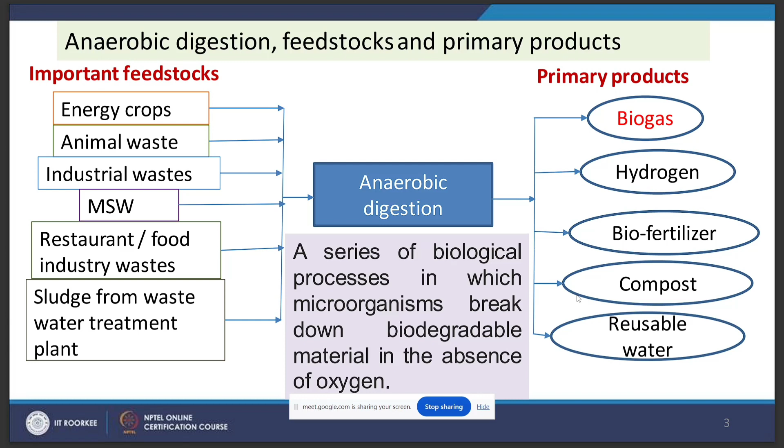So let's see what biogas is. Biogas is a combustible mixture of gases. It has high calorific value. It mainly consists of methane and carbon dioxide, in which CO2 has lesser calorific value than methane. It is formed during the anaerobic bacterial decomposition of organic compounds in absence of oxygen. If we see the major components of biogas, it contains 50 to 75% methane and 25 to 50% CO2, and along with methane and carbon dioxide, there are some other gases which are formed, like

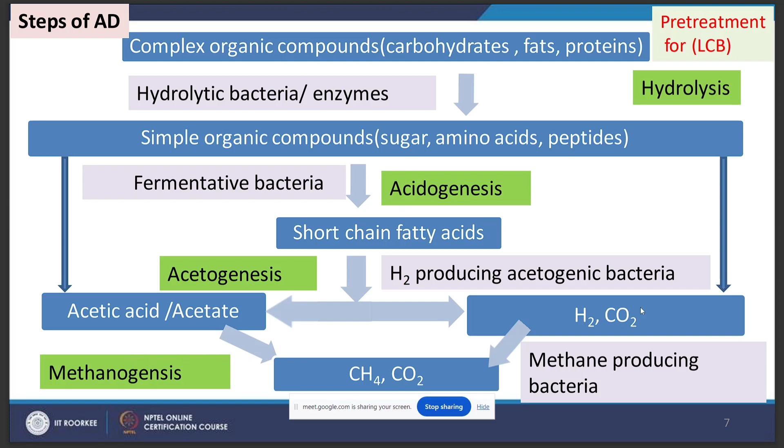After the formation of short chain fatty acid, it can undergo two pathways. It can produce either acetate, or hydrogen producing acetogenic bacteria will produce H2 and CO2. So after acetogenesis, we have two products, acetate and hydrogen. Both acetate and hydrogen are converted to methane by two different pathways. Acetate can be converted to methane and CO2. Also, hydrogen can be converted to methane and CO2 by methane producing bacteria.

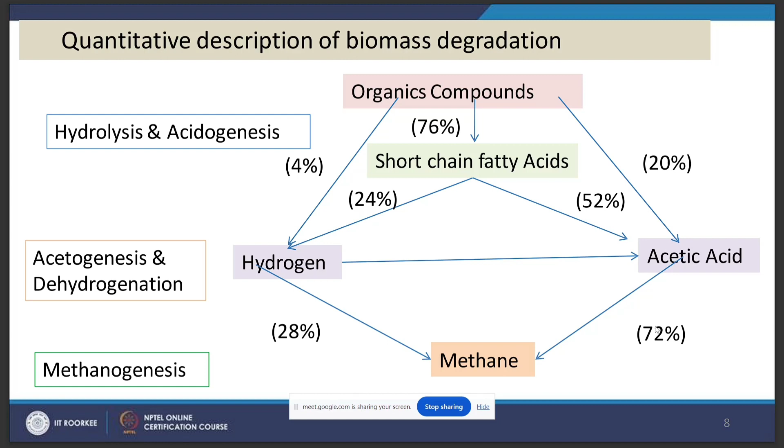So here is the pathway. We can see that the hydrogen to methane route constitutes around 28%, and acetic acid constitutes around 72% of the methane produced in the biogas. So here is the elemental description of anaerobic digestion. Since it is a bacterial phenomenon, it is dependent on microbes.

So different factors will affect the biogas yield. There should be some optimum solid content in the feed. The organic loading should not be very high and should not be very low, so that the microbes can sustain. Next, there should be an optimum carbon to nitrogen ratio. The temperature should be optimal; it is generally around 35 degrees centigrade. For the pH of the solution, acidogenesis requires acidic pH, and methanogenesis requires neutral pH. So pH of the solution should be optimum.

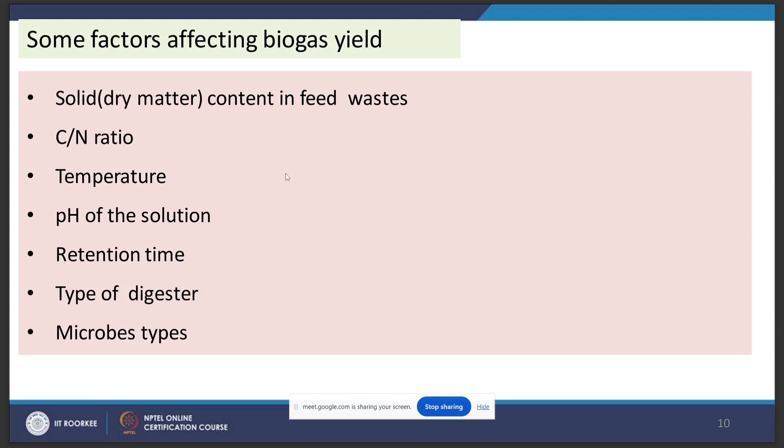And next is retention time. Since the anaerobic digestion is conducted by anaerobes, that is the anaerobic bacteria, the retention time required here is very high as compared to the aerobic bacteria, because their growth yield is very slow. Next is the type of the digester, and last is microbes type.

So here is a group of the microbes which are used in anaerobic digestion. First is the non-methane forming, and the other one is the methane forming. In the non-methane forming, there will be two types of bacteria. First will be the hydrolyzing and fermenting bacteria. Next is the acetogenic bacteria. By hydrolyzing bacteria, some organic compounds are converted into acids, and in acetogenic bacteria, these are the hydrogen producing acetogens and the homoacetogens.

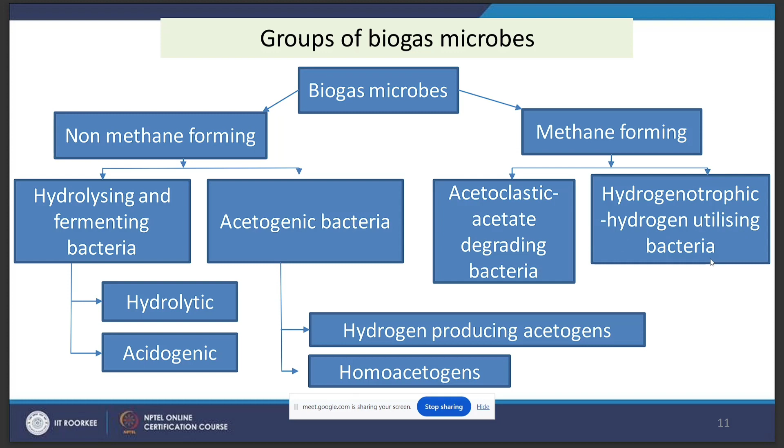Next is the methane forming. We have seen that methane can be formed from two products, that is hydrogen and acetate. There will be two classes of bacteria. First is the acetoclastic, acetate degrading bacteria, and next is the hydrogen utilizing bacteria. So the role of microbes involved in the three stages. The very first step is the fermenting bacteria, which converts the complex organic compound into simpler one. This process is known as hydrolysis.

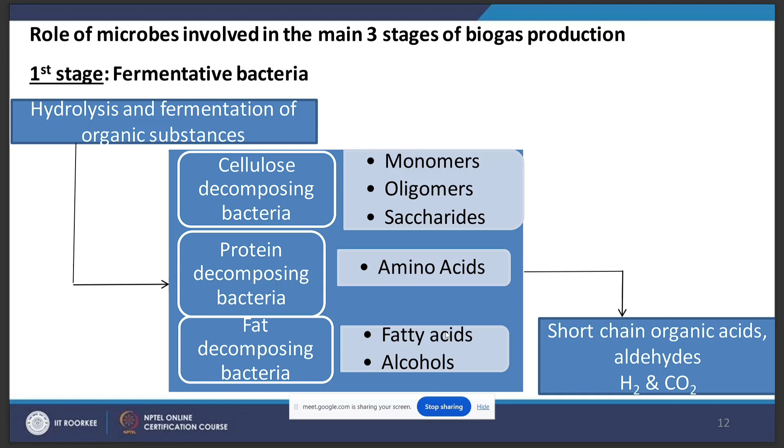So we can see that all this cellulose, protein and fat are converted to short chain organic compounds like hydrogen and CO2. The protein is converted to amino acid, which is further converted to this one. Fat is converted to fatty acids and alcohol. Cellulose is converted to monomers, oligomers and saccharides.

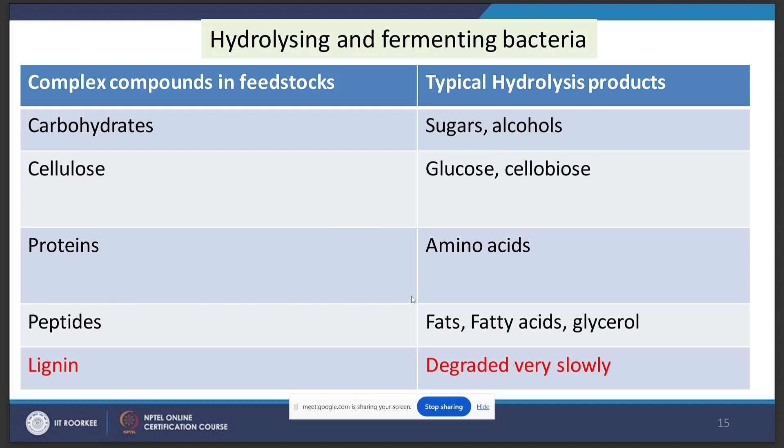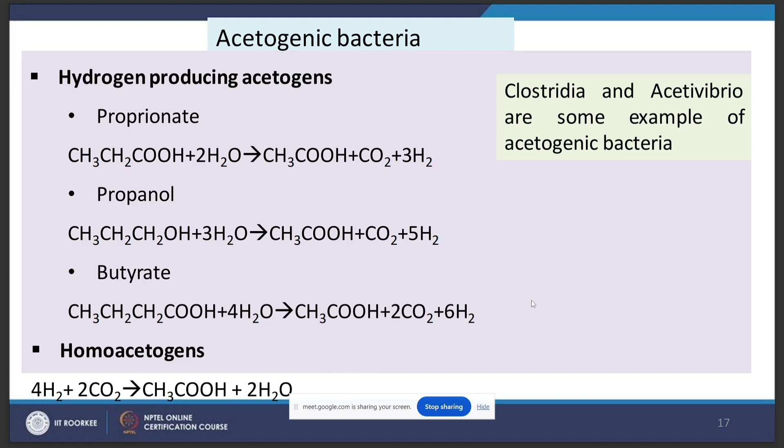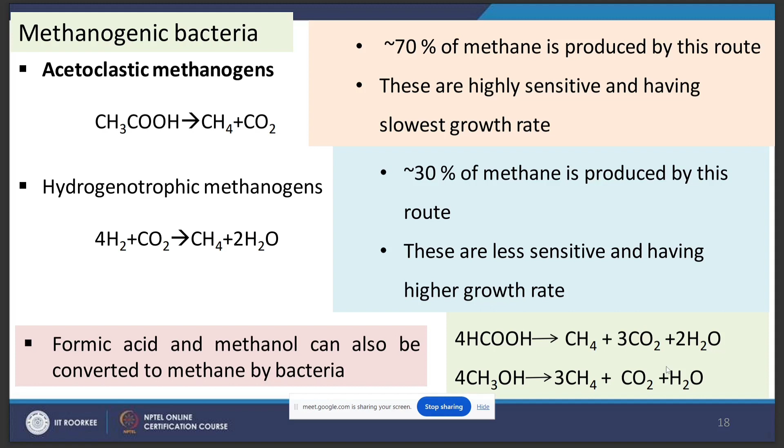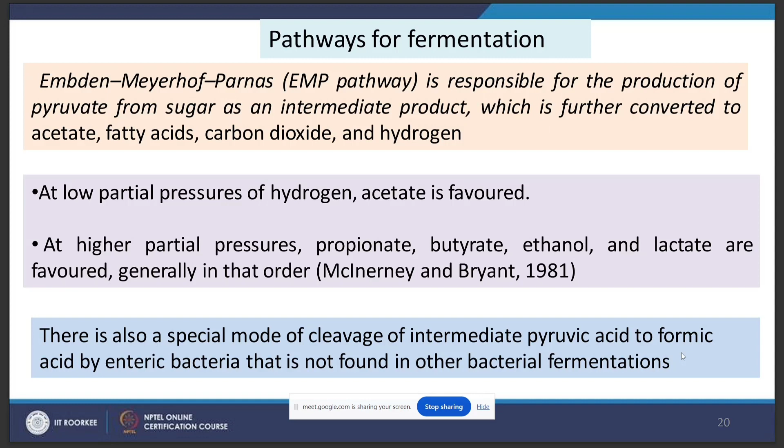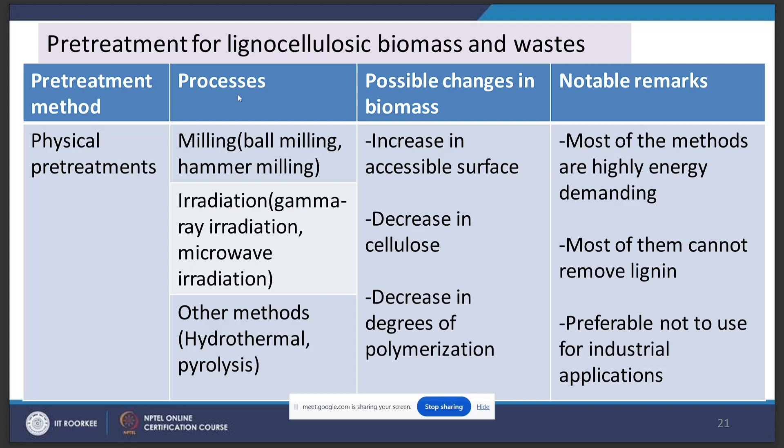So, I have discussed in the flowchart that some sort of pre-treatment is required for lignocellulosic biomass. Some of the physical pre-treatments are ball milling, where size reduction is required, irradiation and other methods. Then next are the physicochemical pre-treatments like explosion, alkali treatment, acid treatment, or treatment with some sort of oxidizing agents.

And last is the biological treatment, in which some sort of fungi or other microbes are used, which reduces the degree of polymerization of cellulose, or leads to partial hydrolysis of hemicellulose. Another possible change in biomass is that, since lignin is very hard to digest, delignification takes place. So let's move to the next.

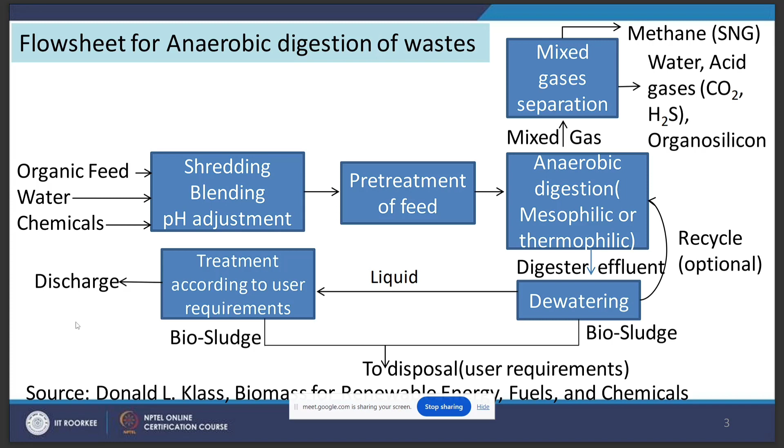So the second lecture is also on energy production from organic waste through anaerobic digestion. Here is the flow sheet for anaerobic digestion. We can see that after pre-treatment of the feed, anaerobic digestion is conducted. We get the gaseous product, and we get the digested effluent, which after dewatering gives sludge and liquid, which after proper treatment can be discharged or sent to the start of the treatment plant if sludge is being digested.

So there are two types of anaerobic digester. It can be dry or it can be wet. Basically, in dry anaerobic digestion, the total solid content is high compared to wet. In dry, it is 25 to 45%, so this much will be solid and the rest will be water. But in wet, the solid content should not be more than 15%.

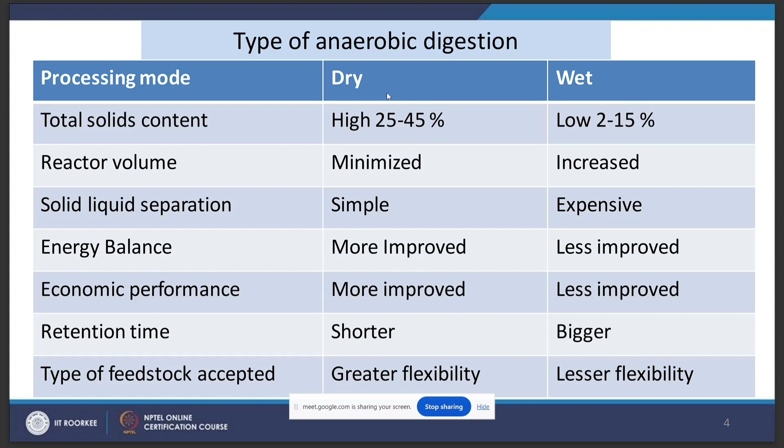As dry reactors have high solid content, they require less reactor volume. Solid-liquid separation will be simple. The energy balance will be improved. It will be economically more viable. Its retention time will be shorter, and it will have greater flexibility of feedstock.

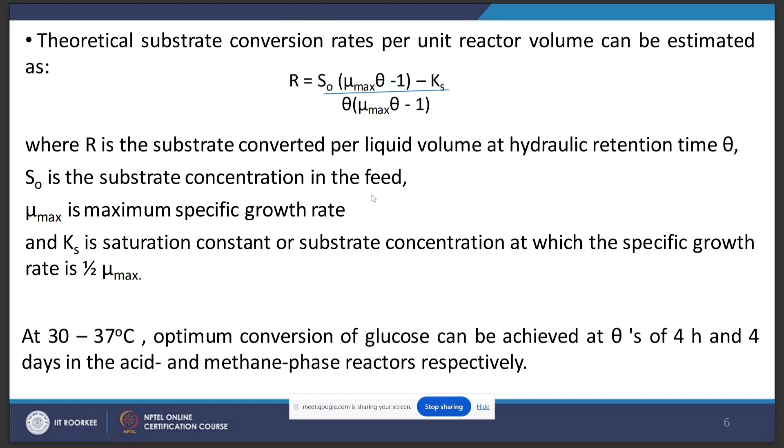Also, the transfer of gaseous product to the gas phase may be the rate limiting step in some cases. Here a formula is given for the theoretical substrate conversion rate per unit reactor volume. Please go through this. Next, retention time is discussed. Please also go through these.

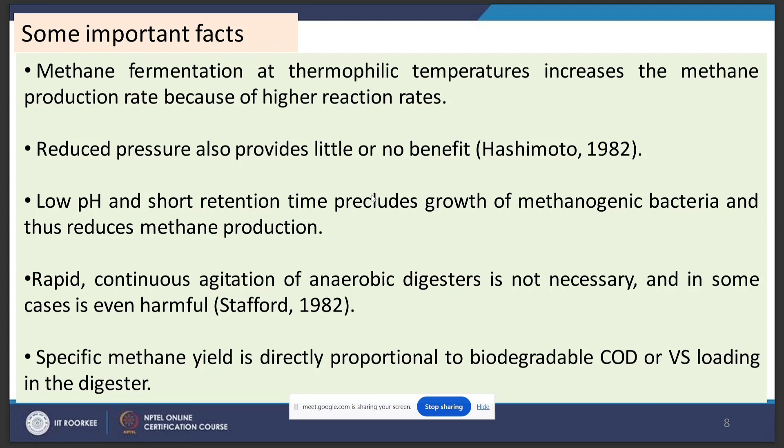And if there is vigorous mixing, then there are chances that these methane forming bacteria or the other bacteria in the reactor will not be able to multiply, and so it will be harmful for the digestion. And the specific methane yield is directly proportional to the biodegradable COD or volatile solid loading in the digester. If the feed has higher biodegradable COD, then the methane yield will be high because these microbes feed on the biodegradable COD.

So here is a figure for the anaerobic digester. We can see that it has different parts. The bottom part has space for ground sludge pipe and ground injection pipe. Next, it has a mixing zone. At the bottom, the sludge after digestion settles, and from here it is taken out from time to time. Above this, we have a mixing zone where mixing of the digester is done.

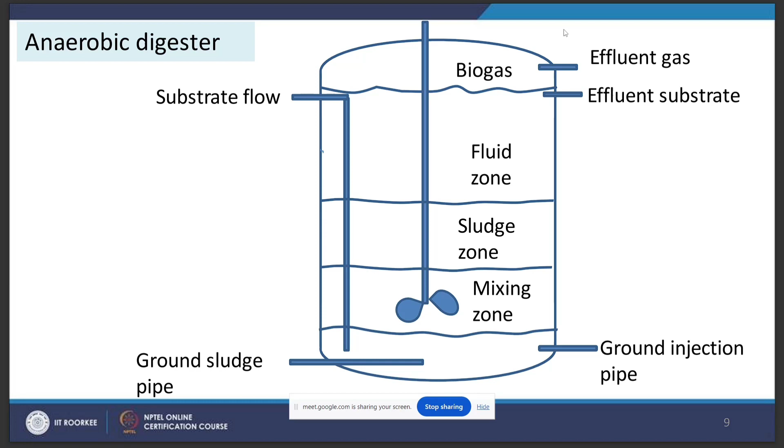Next is the sludge zone. In the sludge zone, the active digestion takes place. Above that, it has a fluid zone in which the supernatant accumulates, and this is taken out from the reactor. And there is also an outlet for biogas, that is the effluent gas.

So there are two types of digester. It can be a low rate, the conventional digester, or it can be a high rate digester. In the low rate conventional digester, intermittent mixing is done, and intermittent sludge feeding and withdrawal is done. It has a detention time of generally 30 to 60 days, that is 1 to 2 months, and the feeding rate is also less as compared to the high rate digesters.

And in the high rate digesters, continuous mixing is done so that the whole sludge and the feed inside the reactor is homogenized. It can be continuous or intermittent sludge feeding and sludge withdrawal. And here the detention time is very less. We can see here it is generally less than or equal to 15 days, which is much lower than the low rate digesters.

Also, most digesters are heated and operated in the mesophilic range, and are made of concrete or steel. We have seen previously that with increase in temperature, the yield of the biogas can be increased, so these reactors are generally heated to maintain the optimum temperature. So here some of the digester operation is given: most digesters are operated in the temperature range of 30 to 38 degrees centigrade.

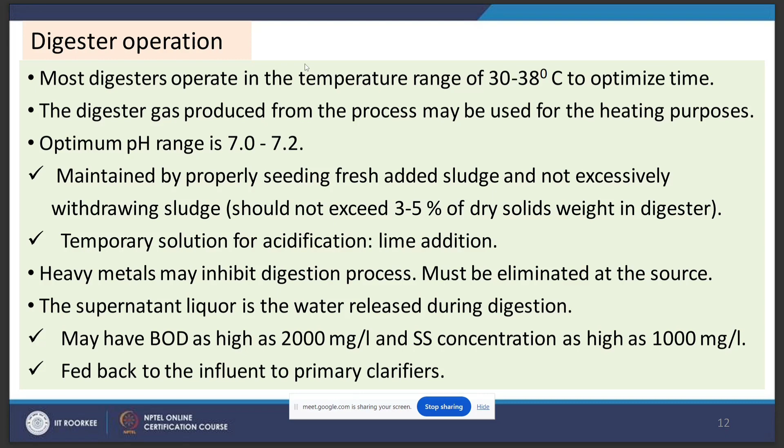So what happens during anaerobic digestion: complex organic compounds are converted to simpler ones. This is the hydrolysis step, and after hydrolysis, acidogenesis takes place, in which the simpler organic compounds are converted into acid. For the acidogenic reactions, the favorable pH is less than 6, around 5.5 to 5.9. The acidogenic bacteria thrive at slightly acidic pH, but the methanogenic bacteria thrive at neutral or slightly basic pH.

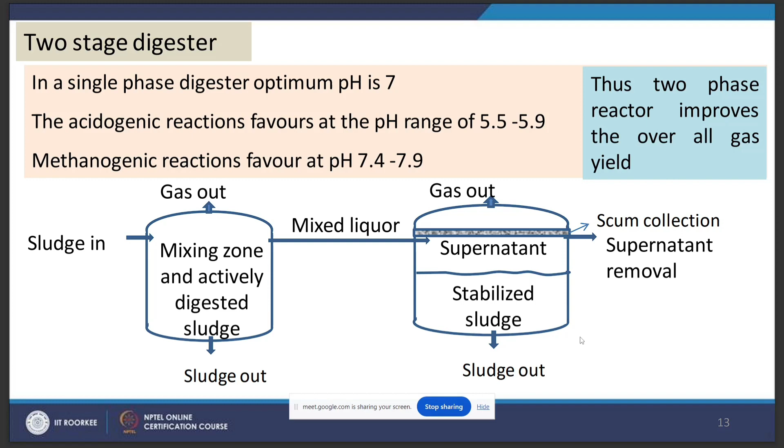And we have seen that the methanogens are very sensitive and have a very slow growth rate. So to increase the efficiency, two reactors can be used. In the first reactor, hydrolysis and acidogenic reactions take place, where the pH can be lower than 6, and in the second reactor, methanogenesis takes place, in which the pH is around neutral or slightly basic, so that proper acidogenesis and proper methanogenesis take place, and we get optimum yield of the biogas.

So here is the schematic of the two-phase digester model. Here we can see that the acid reactor is different and the methane reactor is different.

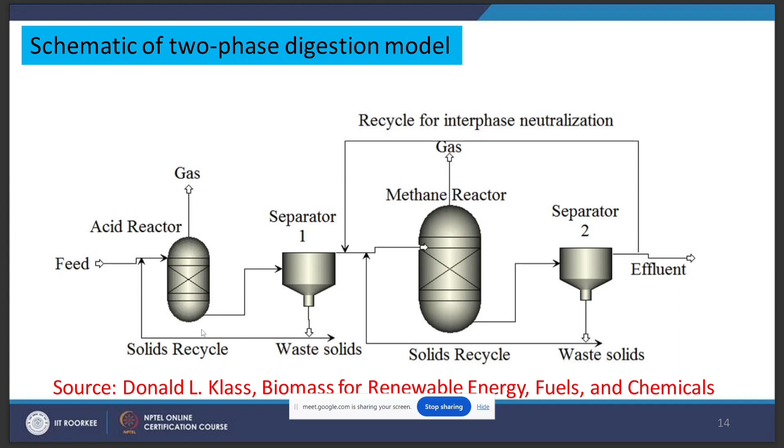So in two-step anaerobic digestion, the main biochemical reaction that takes place in the first reactor is the liquefaction of organic solids, digestion of the soluble organic materials, and it is usually a high rate digester with fixed cover and continuous mixing. And the second stage is generally a conventional low rate digester with a floating cover and intermittent mixing.

So the main process which takes place in the second stage is the supernatant separation, that we have to separate the water from the feed. Next is the gas storage. Whatever gas is produced in the reactor needs to be stored, and digested sludge storage, which is stored at the bottom of the reactor.

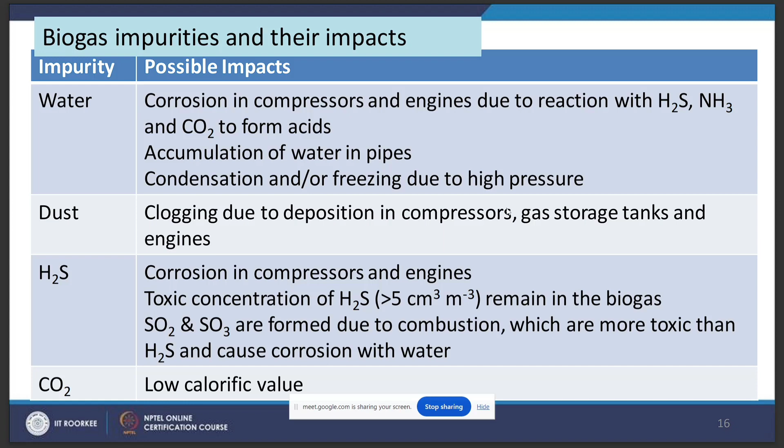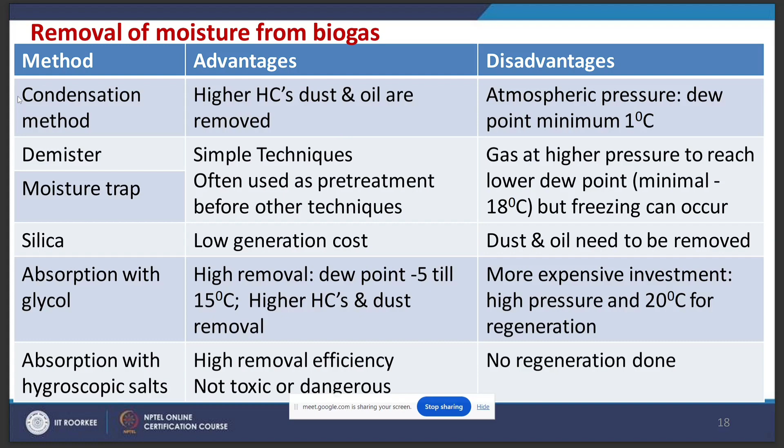Also the biogas which is produced, we have seen in the first slide, has some other impurities like water, hydrogen sulfide, CO2 and dust, which need to be removed. Otherwise it can cause some operational problems during energy generation. So these are some of the methods for removal of moisture from biogas: we can follow condensation method or demister, moisture trap, or we can use silica.

So next is the sludge volume. The volume of digesting sludge in a digester will be a function of volume of fresh sludge added daily, volume of digested sludge produced daily, and the required digestion time. So the volume of digesting sludge will be a function of all these three. And from some empirical evidence and some experiments, it has been seen that

if supernatant is removed from a batch of digesting sludge as it is produced, then volume of remaining digested sludge versus digestion time is a parabolic function, and we get that the average volume will be V1 minus 2/3 (V1 minus V2), where V1 is the volume of fresh sludge added, V2 is the volume of digested sludge produced, and V average is the average volume of the digesting sludge.

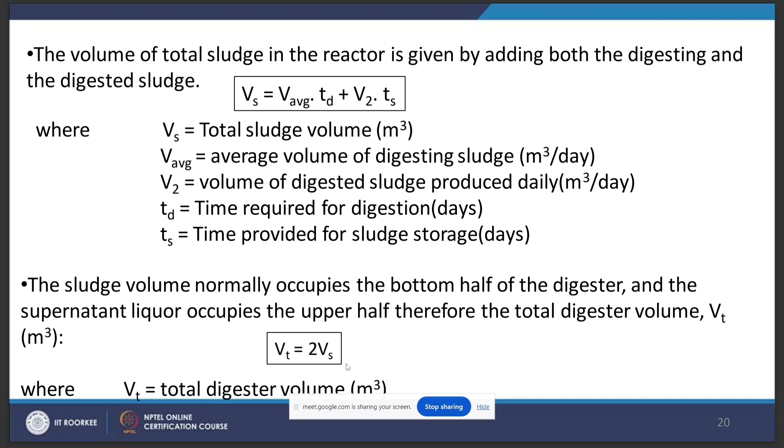So the total volume of the sludge in the reactor will be the average volume and V2, the volume of digested sludge, into their respective retention times. And in the anaerobic digester, the bottom half of the digester is normally sludge, and the top half is used for water, that is supernatant, and biogas. So the total volume of the digester is 2 times the sludge volume. So let's go to the next one.

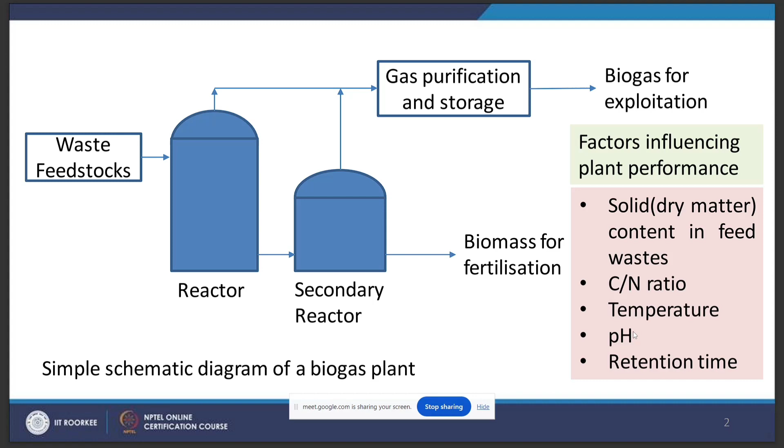So this is the last lecture for anaerobic digester. Here the design of anaerobic digester is discussed. If it is a two-step digester, then it will have a primary first digester where acetogenesis and hydrolysis take place, and a secondary reactor where methanogenesis takes place. The factors which influence plant performance are solid content, carbon to nitrogen ratio, temperature, pH, and retention time. We have seen this in the previous lecture.

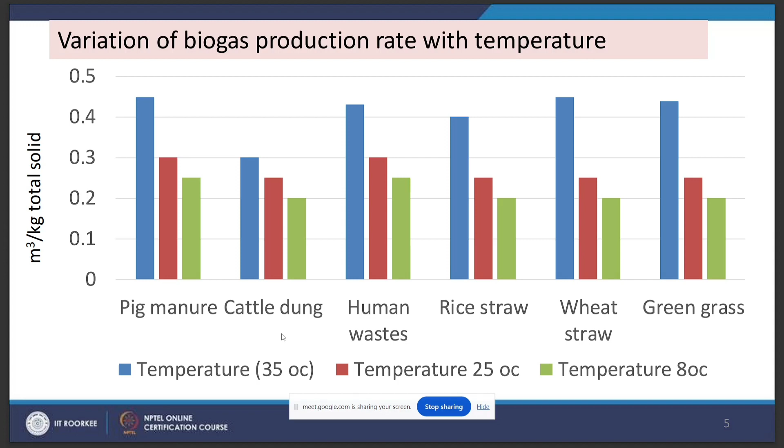So here is a graph which shows the effect of temperature on the biogas produced. We can see here that the green one is 8 degrees centigrade. With increase in the temperature, the biogas production has increased in all the types of feed being used. So around 35 degrees centigrade is generally maintained in anaerobic digesters.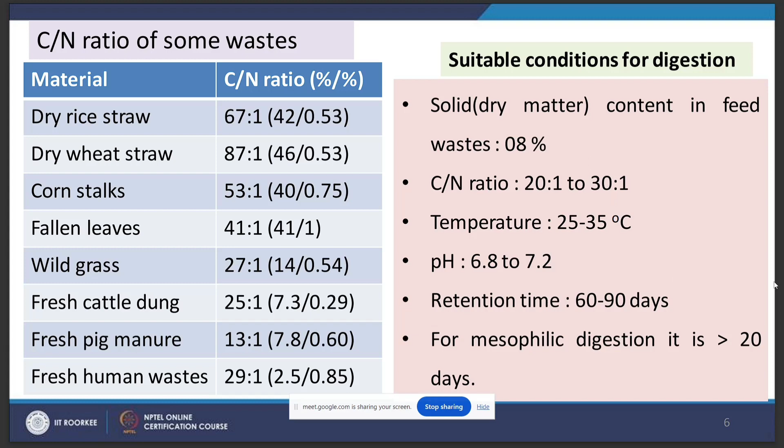So here is the carbon to nitrogen ratio. Generally a carbon to nitrogen ratio of 20 to 30 is to 1 is maintained in the reactor. Temperature is room temperature, around 20, and it is generally in the mesophilic range. Next, pH is neutral, retention time is 60 to 90 days, or it can depend upon the type of the reactor. And for mesophilic digestion, it is greater than 20 days.

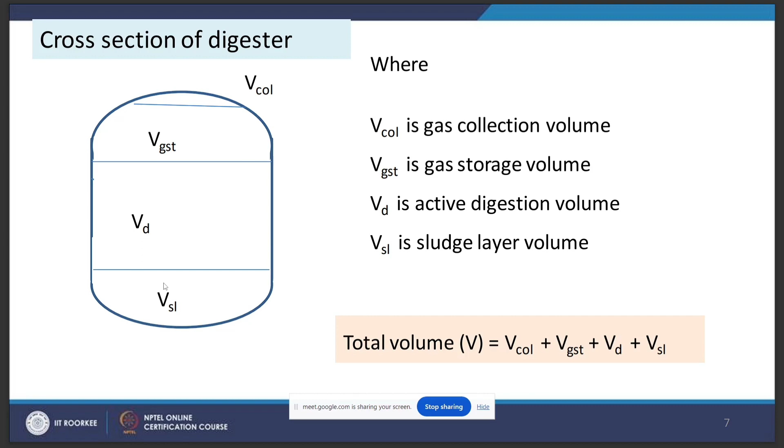So here is a cross section of the digester. The bottom layer will be the sludge layer volume. Above that is the active digestion volume. Above that is the gas storage volume, and at the top is the gas collection volume. So the overall total volume of the digester will be the sum of all these four.

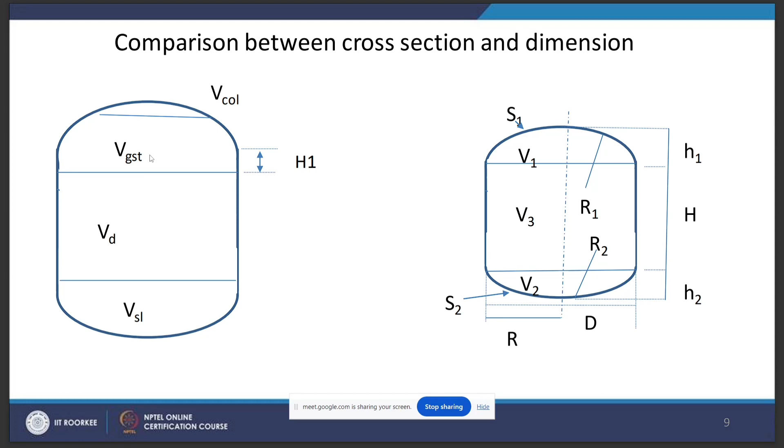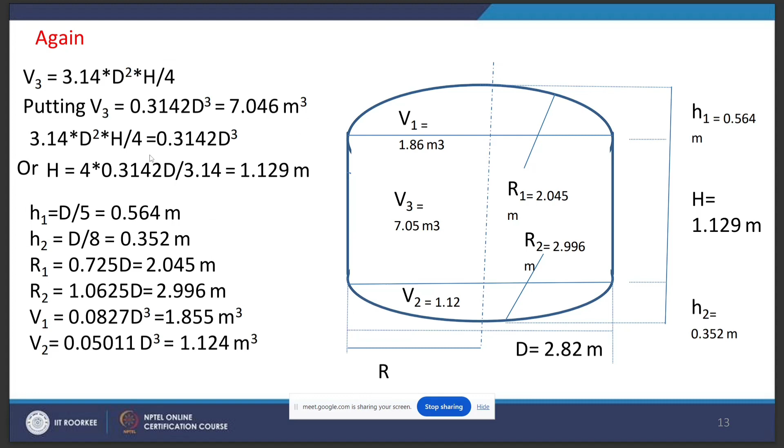So here is a formula which is used to find out the different dimensions of the reactor, and there was a numerical based on that which we will see in the assignment questions. So I think that's it.

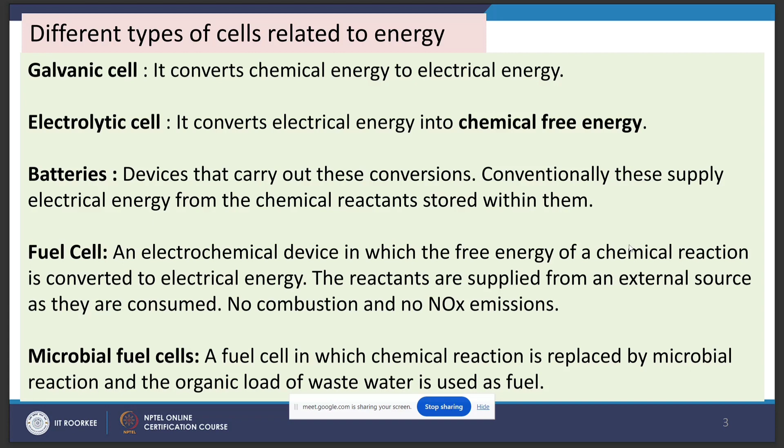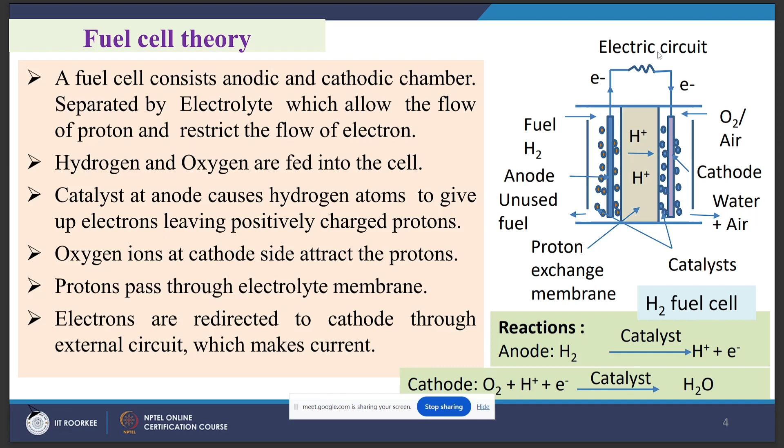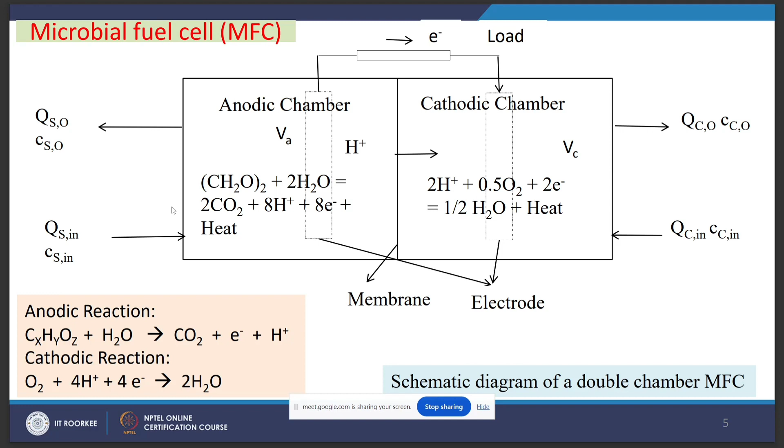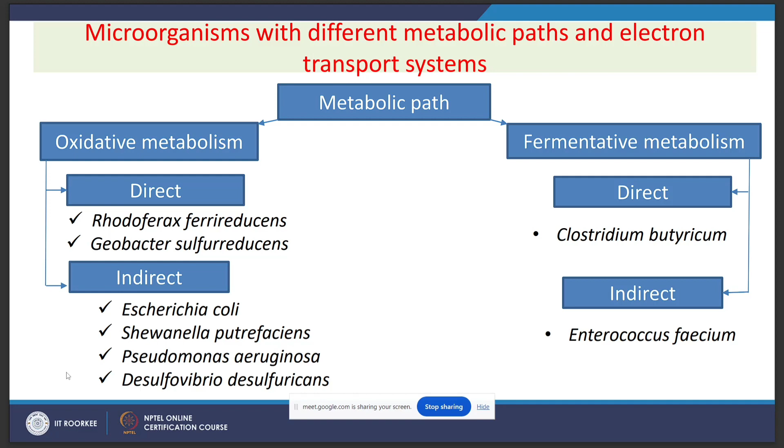So there can be two types of culture used in a microbial fuel cell. It can be a pure culture or a mixed culture. Generally, mixed bacterial cultures are more resistant to disturbance, and their substrate consumption rate is also high. Also, in pure bacterial culture there will be a very high risk of contamination from undesirable bacteria. So, as compared to pure bacterial culture, mixed bacterial culture has higher output.

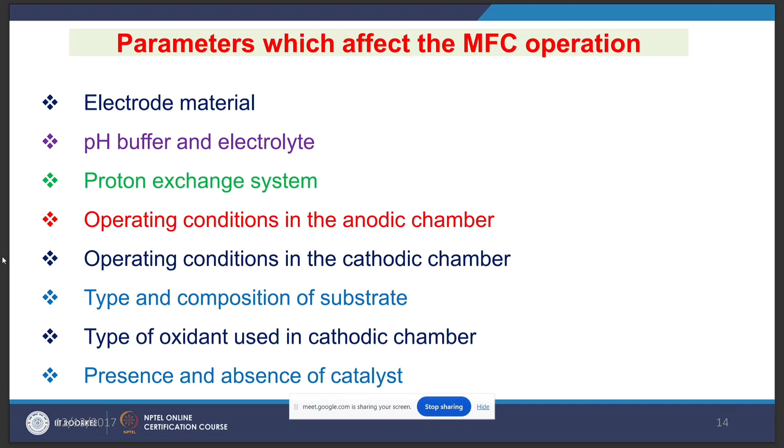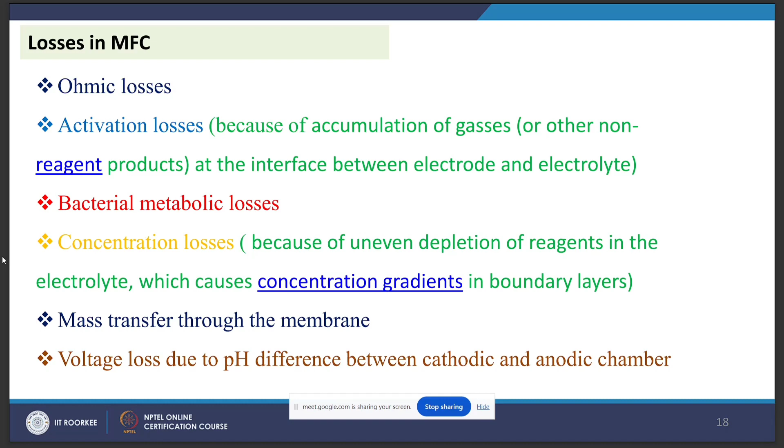So these are some of the parameters which affect the MFC operation, and please go through all these. There will obviously be some losses. Please go through these slides. So let's go to the last lecture of week 6.

So this is on fermentation. The first part of fermentation is in week 6 and the next part will be in week 7. So what is fermentation? It is a metabolic process which converts sugar or acid to alcohol or gases.

So the organic waste or biomass can either be digested anaerobically, we have seen anaerobic digestion, or it can be fermented to ethanol or alcohol, or the organic waste can be gasified to produce syngas, and that syngas can be further fermented to produce alcohol. Ethanol can be used as a blend with gasoline since it has high calorific value. Butanol can be used in pure form or blended with gasoline at higher concentration because it has higher heating value.

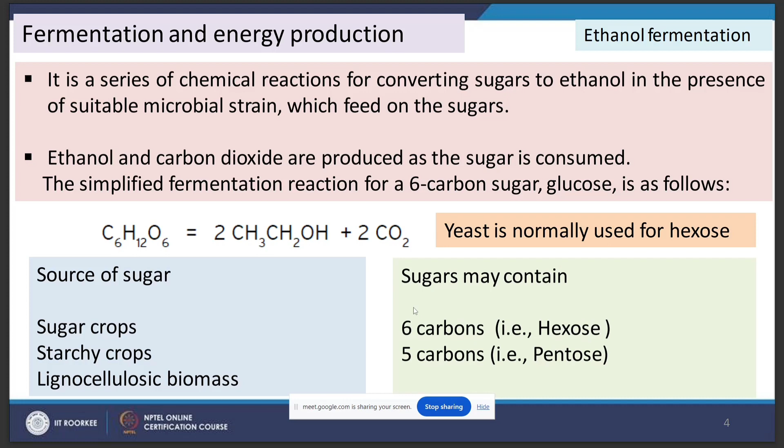Next, fermentation is a series of chemical reactions which convert sugar to ethanol in presence of a suitable microbial strain which feeds on the sugar. The end product is alcohol, here it is ethanol. Here the reaction is given for a compound containing 6 carbons, converted to ethanol. Generally yeast is used for hexose, 6 carbon compounds. Depending upon the number of carbon atoms, it can be hexose with 6 carbons, and with 5 carbons it will be pentose and so on.

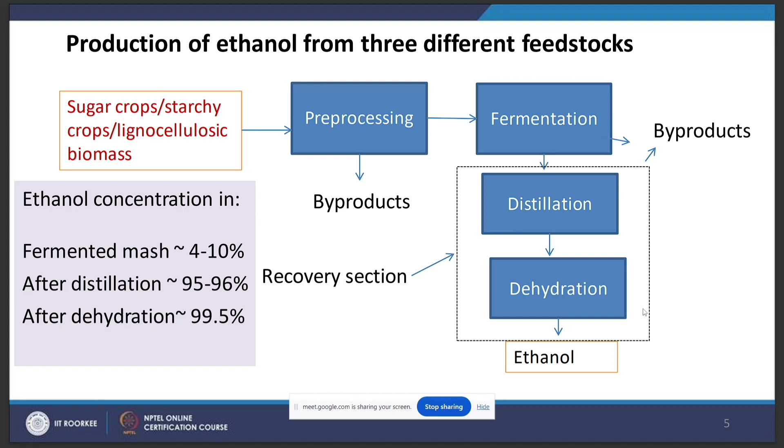Here we can see a flow chart for production of ethanol from a feedstock. Sugary crops can be processed and fermented to produce ethanol, but after processing, the fermented mash has very little ethanol, around 4 to 10%. So it is distilled and we get 95 to 96% ethanol. But for mixing ethanol with gasoline, we need to remove the water content, so dehydration is done by different methods, and we get around 99.5% ethanol.

So the concentration of ethanol in the fermented mash can attain around 4 to 10%. Therefore, distillation is done to get around 95 to 96%, and then it is further dehydrated to get around 99.5% ethanol. Sugar can be fermented directly; if it has starch, the starch is first hydrolyzed to sugar, and if the feed is cellulose, it is also hydrolyzed to sugar and then fermented. The pre-processing steps increase as we go to complex biomasses: sugar has no pre-treatment, starch more, and lignocellulosic biomass more intense pre-treatment.

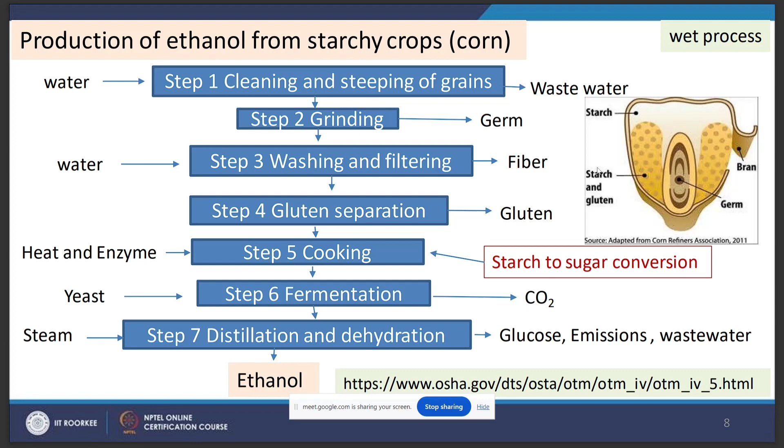Here production of ethanol from a starchy crop is given. The first step is cleaning and steeping of the grains. Next is grinding. After grinding, the germ at the center of the corn is separated, then it is washed and filtered. Then gluten is separated, and step 5 is cooking, where starch is converted to sugar, and finally fermentation takes place, and distillation and dehydration are done to get the alcohol.

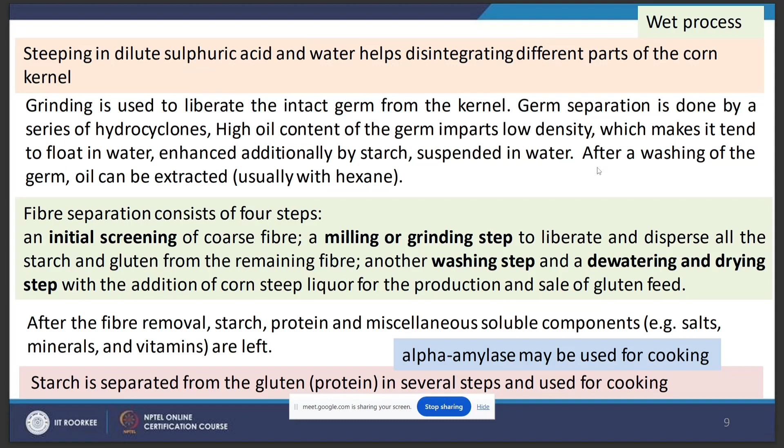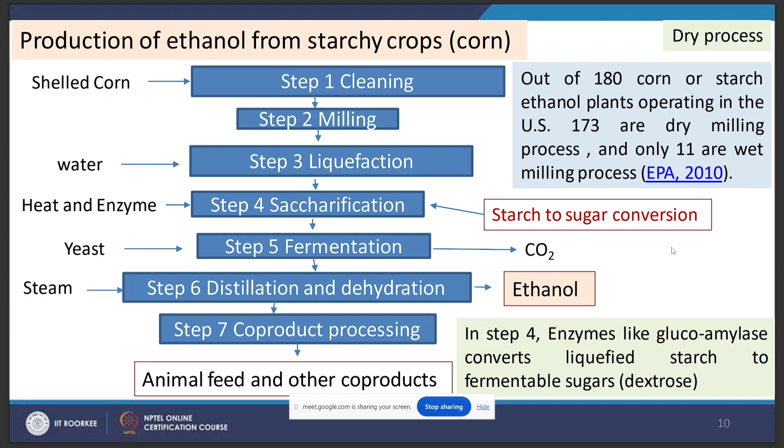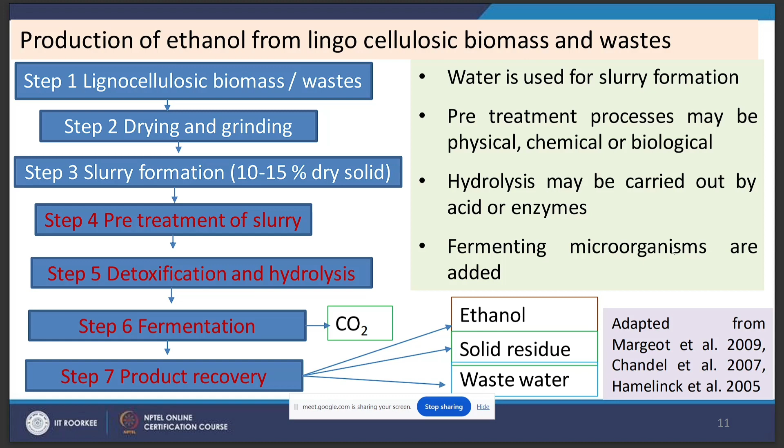So this is the wet process, and next is the dry process. In the dry process, first cleaning is done, then milling, then liquefaction, saccharification, where starch is converted to sugar, then fermentation, followed by distillation and dehydration. Please go through these slides, where ethanol is produced from lignocellulosic biomass. It will also go through some pre-treatment processes, and then it can be used for alcohol production.

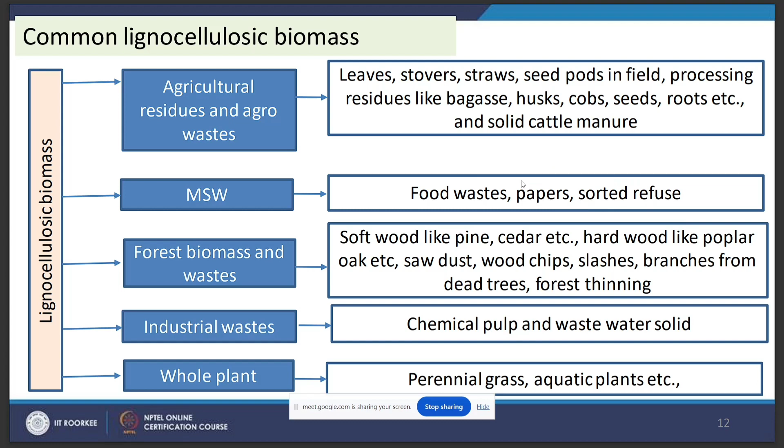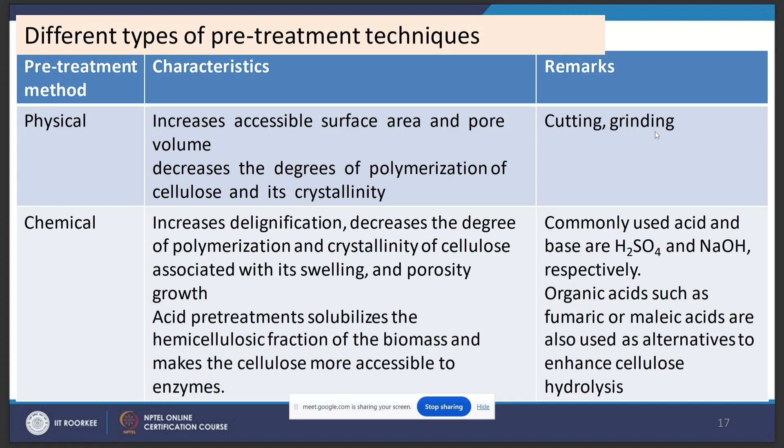Here some common lignocellulosic biomasses are given, like MSW, municipal solid waste. We can use food waste, paper or sorted refuse, and this can be used for fermentation after proper pre-treatment. Here the pre-treatments are given, so please go through these. We can use physical treatment like cutting and grinding, chemical treatment using acids and bases, a combination of both, that is physicochemical treatment, and biological treatments using some microbes.

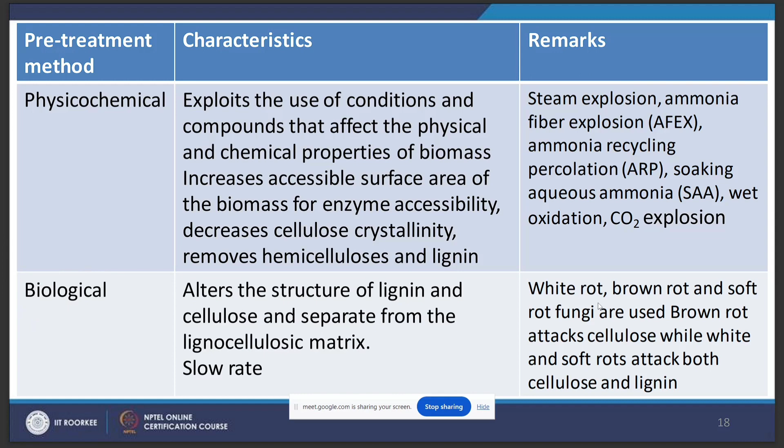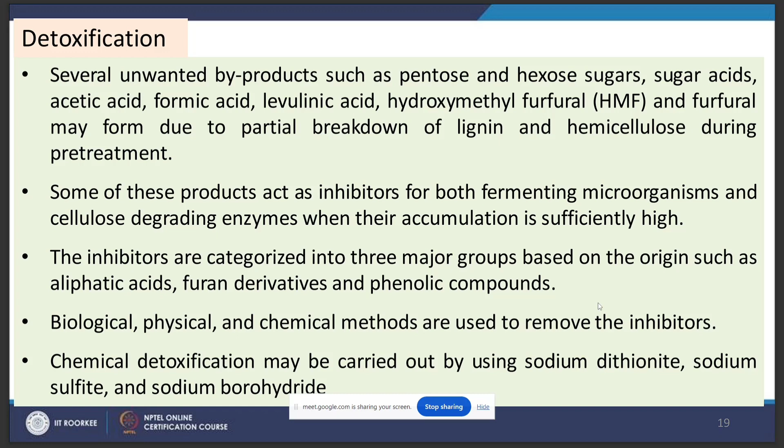Next is detoxification. During fermentation, along with ethanol and butanol, a lot of other unwanted products are formed, and if their concentrations are not controlled, they can be harmful for the microbes performing fermentation. So inhibitors and controlled operating conditions are used to control the concentration of these byproducts. So these were the parts in fermentation, and these were the 5 lectures in week 5.

So now we will move to the questions. The first question is, which of the following is not a primary product of anaerobic digestion? A, hydrogen; B, biofertilizer; C, reusable water; or D, bio-oil. I'll wait for 2 minutes and then we will discuss the answer.

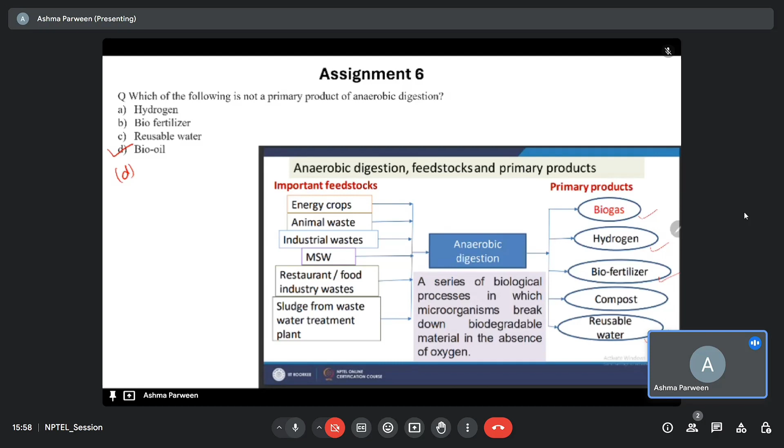So let's go to the next question. The question is, match the following major component of biogas with their appropriate percentage. Biogas consists of methane, carbon dioxide, oxygen, water and others. We have been given carbon dioxide, methane, nitrogen, oxygen. So we have to find out the percentage of these compounds in the biogas. Again, we will discuss the answer after 2 minutes.

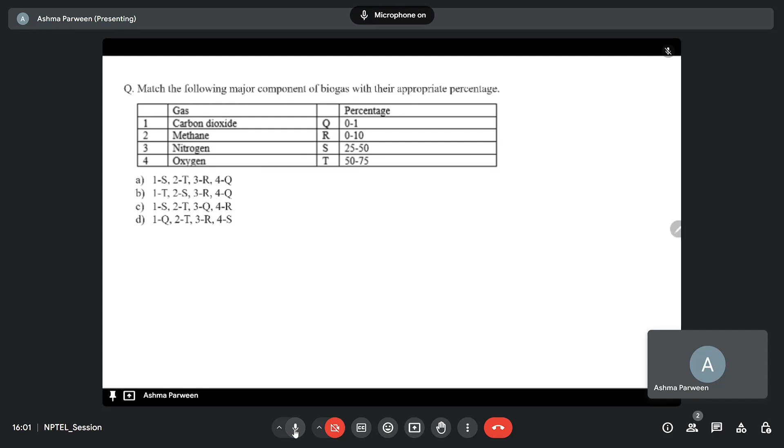So after S, it will be T. Nitrogen is 0 to 10%, so it will be R. And last, oxygen is 0 to 1%. So A is the correct answer.

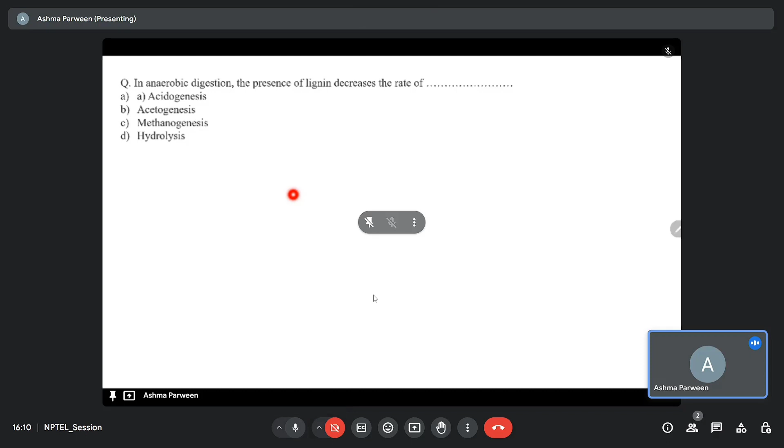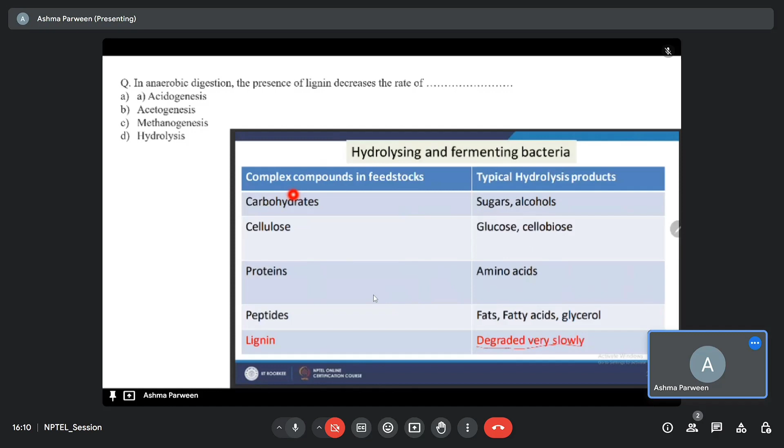So we have seen that if the feedstock has lignin, hydrolysis will be the rate limiting step because lignin degrades very slowly. So D is the correct answer. So let's move to the next question.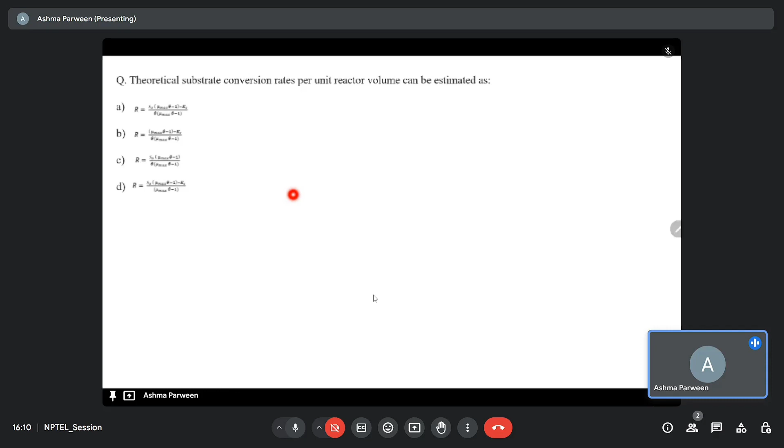The question is, theoretical substrate conversion rate per unit reactor volume can be estimated as. It was there in the slide. We can see that the theoretical substrate conversion rate per unit reactor volume can be estimated using this formula, where R is the substrate converted per liquid volume at hydraulic retention time of theta,

So the photo is really blurred. So A is the correct answer.

So let's move to the next question. The question is, match the following waste with their typical methane content. Three types of waste are given and we have to match them with the methane content they produce during anaerobic digestion. Again we will see the solution after 2 minutes.

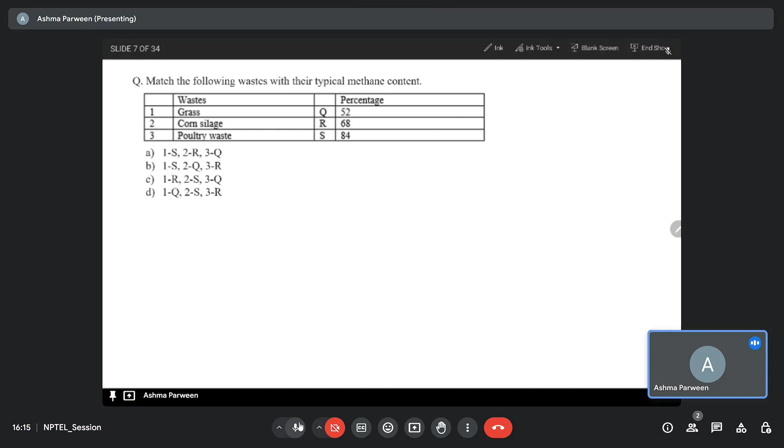So let's see how to solve this question. We have to refer to the table given in the slides: grass can produce around 84% methane in the biogas, so for grass S. From corn silage around 52% of the biogas is methane, and for poultry litter we can see 68% is methane. So S, Q and R. So B is the correct answer.

Don't know what happened.

So the next question is, a galvanic cell is used to convert A, electrical energy into chemical free energy, B, chemical energy to electrical energy, C, mechanical energy to electrical energy, or D, none of the above. We have seen the definition of a galvanic cell in the second last lecture, which was about microbial fuel cells. So we will see the answer after 2 minutes.

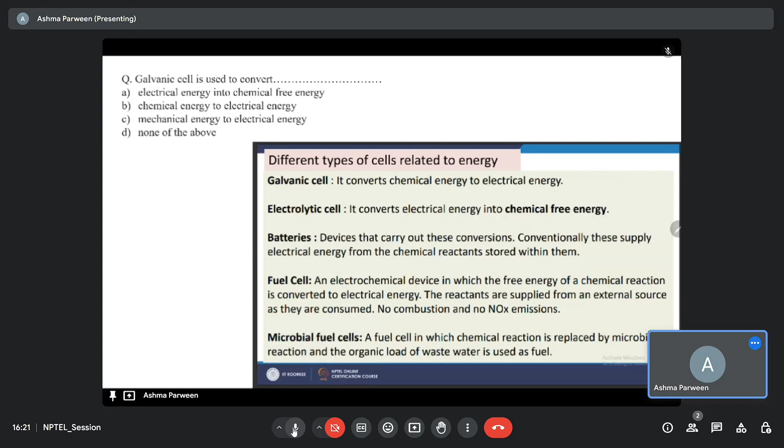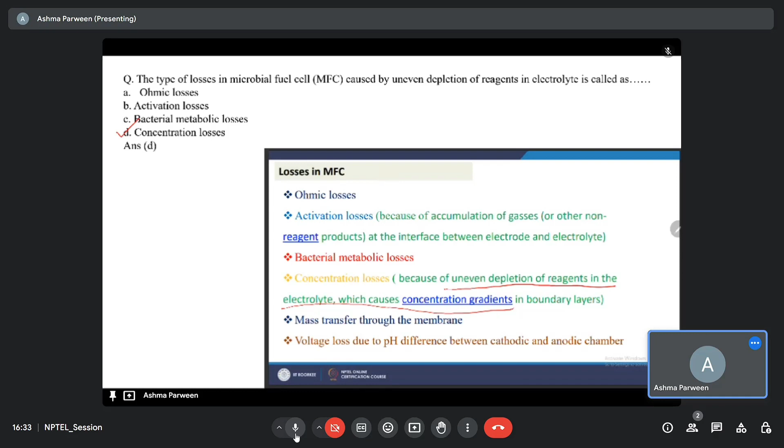So we can see that concentration loss is because of uneven depletion of reagents in the electrolyte, which causes concentration gradients in the boundary layers, and this reduces the efficiency. So D is the correct answer. Let's go to the next question.

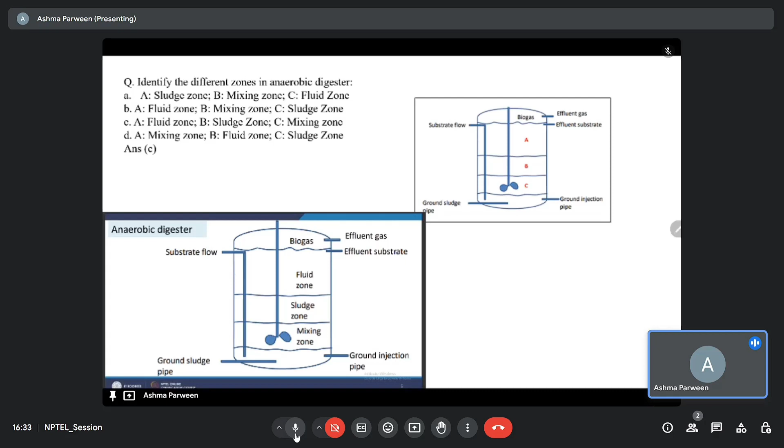So the question is identify the different zones in anaerobic digester. So we have to identify what is A, B and C in this figure. So here we can see a picture of an anaerobic digester. We can see that C is the mixing zone. Let's start with A. A is the fluid zone where the supernatant is in the digester.

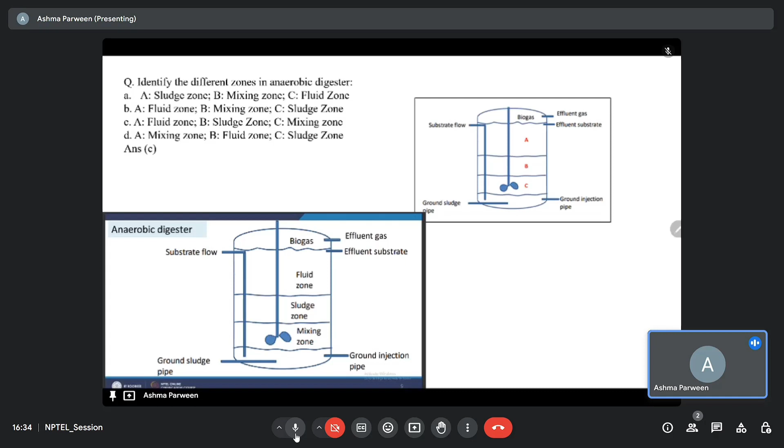B is the sludge zone; this is the active zone where digestion of the feed takes place, that is the sludge zone. And C is the mixing zone. So A is the fluid zone, B is the sludge zone, and C is the mixing zone. So C is the correct answer. So let's move to the next question.

So we have to identify A, B, and C in the fuel cell. So here is the picture. We have to identify what is A, what is B, and what is C. We will again see the answer in 2 minutes.

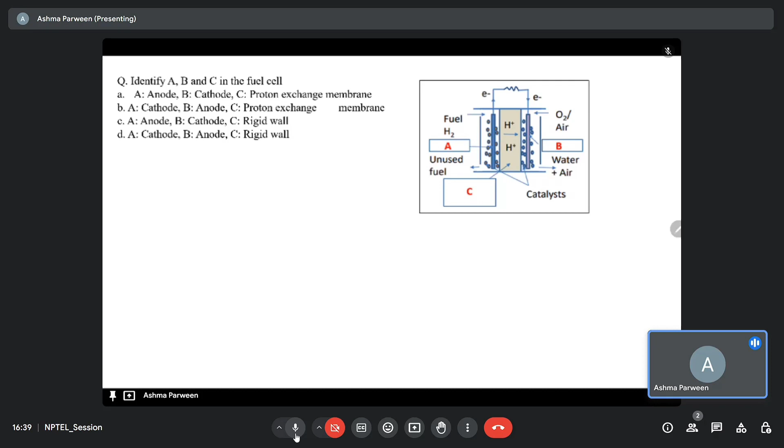So in the fuel cell, where hydrogen is fed, it is the anode where oxidation takes place, and where oxygen or air is fed, it is the cathode where reduction takes place. And also there is a permeable membrane through which only H+ moves from the anode side to the cathode electrode. So C is the proton exchange membrane, A is the anode, and B is the cathode. So A is the correct answer. So let's move to the next question.

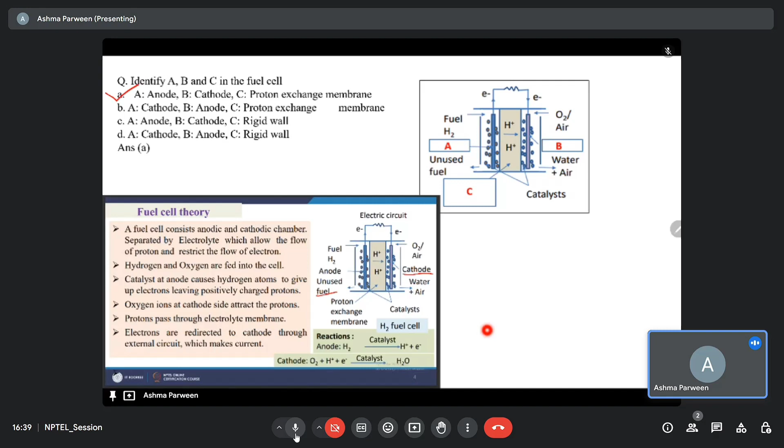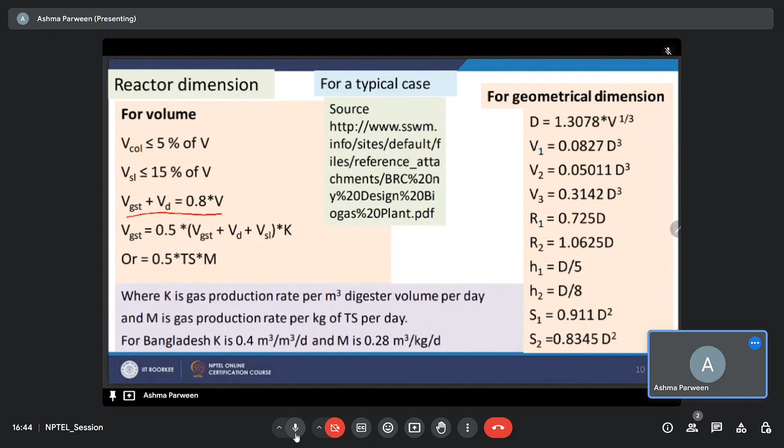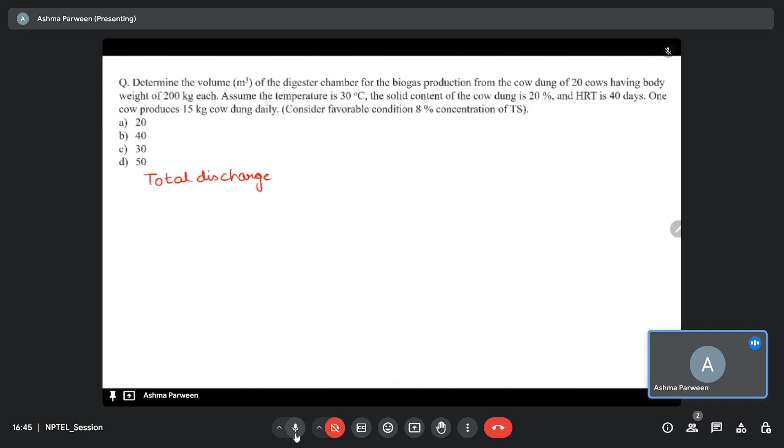So let's start here. We have to find out the volume of the digester chamber. So here in the question, we will first find out how much discharge is from the cows per day. So total discharge will be number of cows, which is 20, into how much cow dung one cow produces in one day. One cow produces around 15 kg of cow dung. So 20 into 15, so 300 kg per day is the discharge of the cow dung.

Next, we will find out the solid content. So we can see here that the solid content of cow dung is 20%. So total solid content will be 20% of the discharge. So it will be 0.2 into 300, so it will be 60 kg.

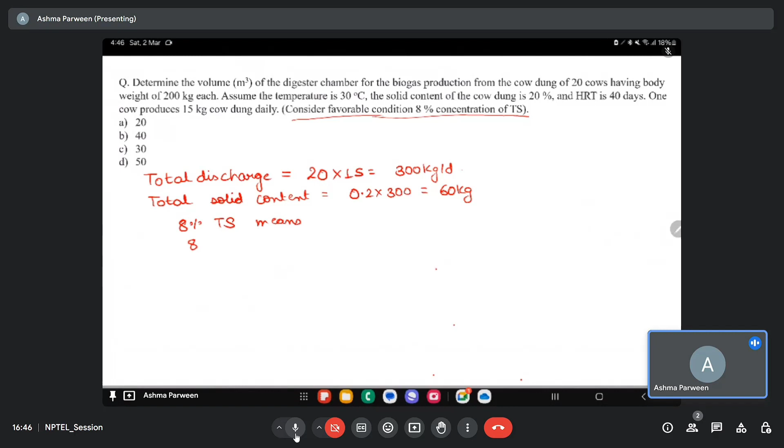Next, it is given in the question itself that the favorable condition is that we need to have 8% concentration of the total solid. And we have 60 kg of the total solid content, so we have to see how much we have to dilute this. 8% TS means we have 8 kg of solid in 100 kg of total influent. So for 60 kg of solid, we will need 100 by 8 into 60 kg of the influent, which is coming out to be 750 kg. So total influent required is 750 kg.

And working volume of digester is given as Q into HRT, where Q is the discharge rate, or how much influent we have to feed per day, and HRT is the retention time. So we have 750 kg influent per day, and HRT is given in the question as 40 days, so 750 into 40. So the working volume is coming out to be 30,000 kg. And we know that 1000 kg is equal to 1 meter cube, so 30,000 kg will be 30 meter cube.